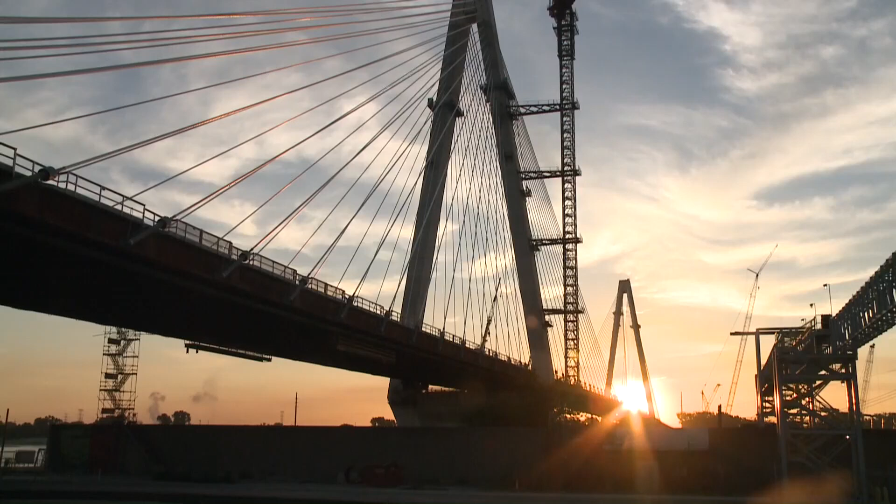Stan Musial and vets together, there's nothing, no more Midwest. Simply beautiful, strikingly complex. We could sit back and we could reminisce on, hey, we put that together. We poured that concrete. This is the making of the Stan Musial Veterans Memorial Bridge, a landmark of legend.

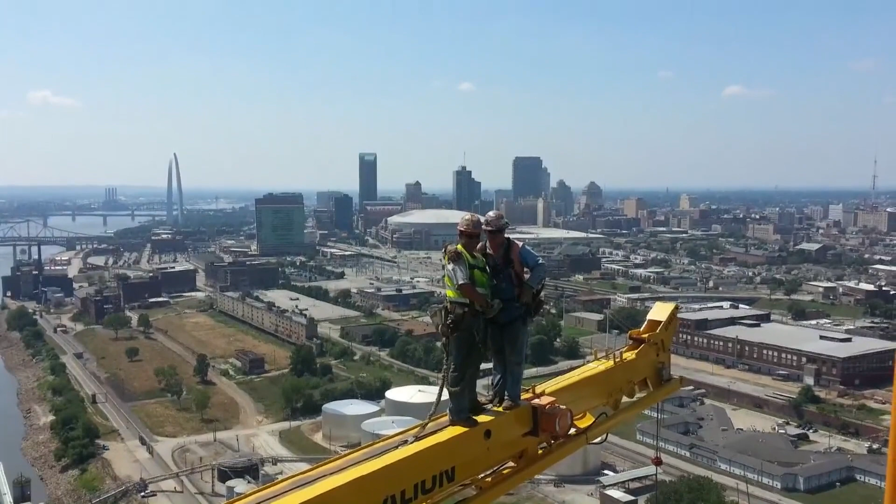Greg Combs and his friends had a front row seat. I kept thinking how lucky I was to be on that job. At one of our city's most exciting events. Being able to work on a landmark in your hometown is really something else. On this day, they share a few photos. What do you call them? Glamour shots? Captured from their unique perspective. Pretty much when you're building something, you remember setting almost every piece of it.

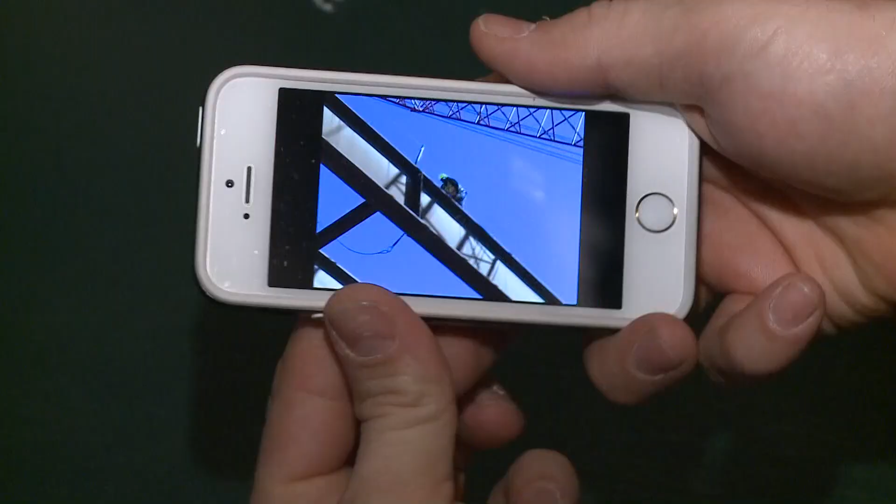Photos freezing moments of tension. You look at the numbers and it looks right on paper, but they were like 97, 98% capacity. Suspense. You had 167,000, I think that piece weighed, and you transferred it between 3 cranes in the air. Or just hanging out. I just got those two over there and they're talking. It's kind of neat seeing us, not in any kind of pressure, just how we're just kind of hanging out on the iron.

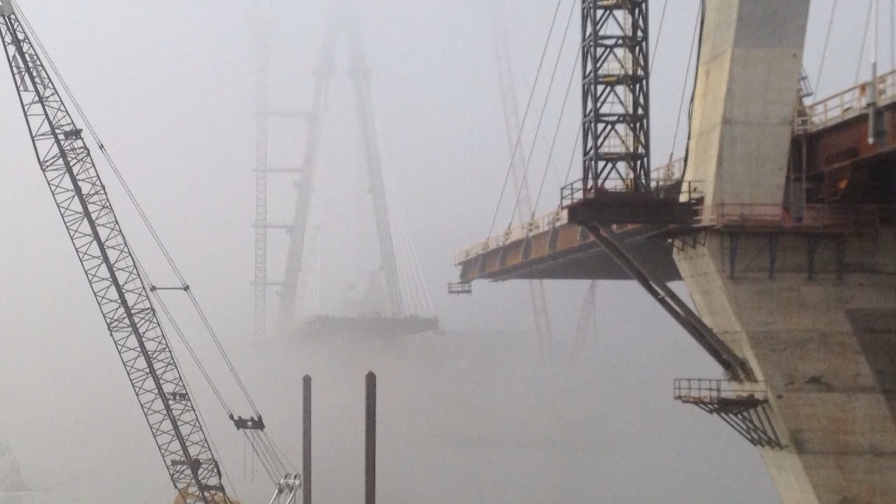Memories that will last a lifetime. We had a family day down there, and I got to bring all my nieces and nephew up there with me, and we all got us some pictures up there. They kind of understood what I did then. A structure that will last for generations. And you always catch yourself when you're walking out to your truck at the end of the day, you look back and look up, see what you did, take a second and say, wow, that's pretty neat.

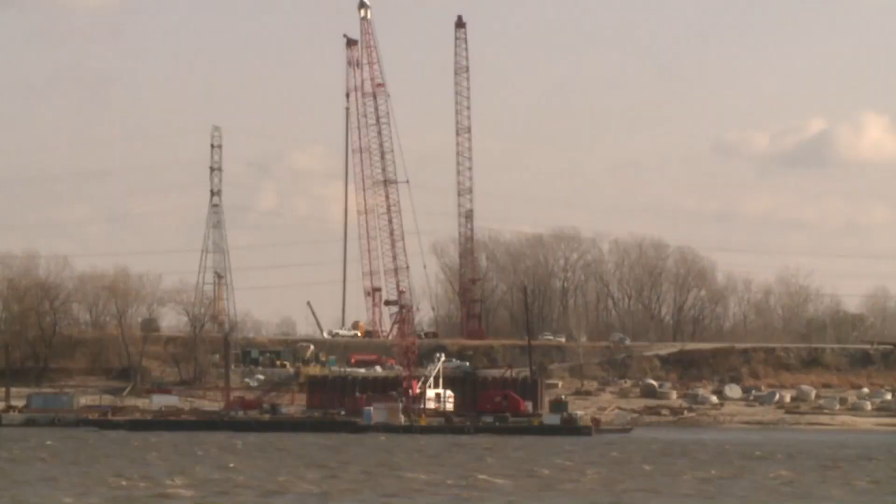The $700 million project started in 2010, right in the middle of the Mississippi River. But years before the bridge started to take shape over the river, there was work being done under the river. It's late in 2010, and workers are busy laying the bridge's foundation. Their first priority, building cofferdams around each of the bridge's 2 bases. The dams not only provide a place to work, but also give workers access to their unique job site. Greg Horn works for the Missouri Department of Transportation and is the project's director.

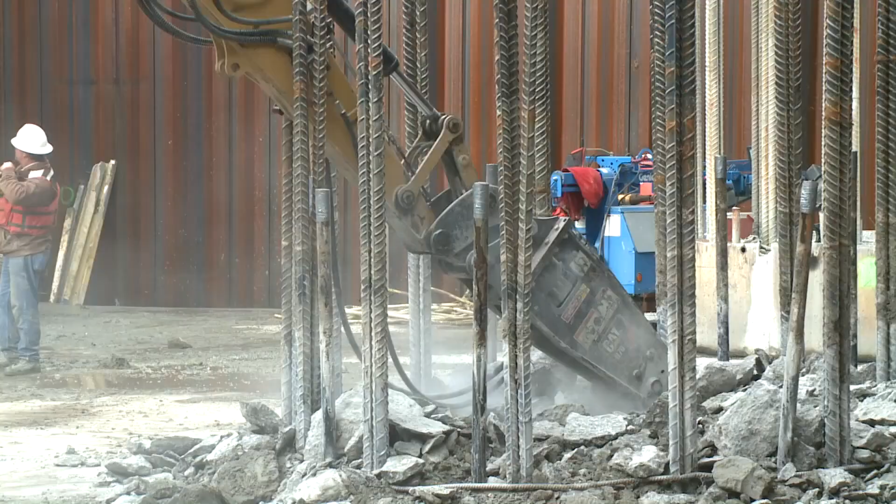Right now we're at the bottom of the cofferdam. We're about 20 feet, 25 feet under the water. We're actually sitting on the floor of the Mississippi River. Workers have drilled 6 shafts to support each tower. Tons of concrete, reinforced with tons of steel. They're 100 feet long. These clumps of 3, each one of those 100 feet long weighs about 2 tons. So when they set this in place, it's pretty amazing. They lower that down. And they have, you don't see them here, but they have bands underneath that are all tied together every 1 foot.

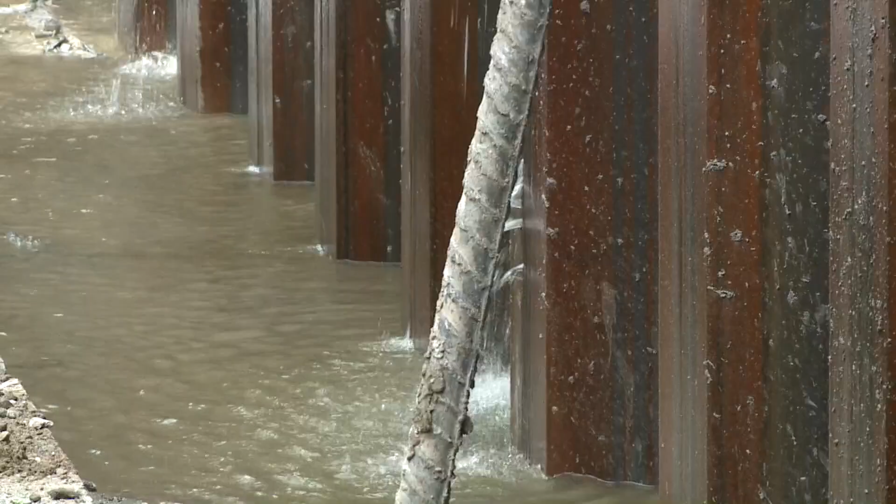Sheets of steel wedged down into the riverbed create a precarious workspace. There's always going to be water in here. You can never get these perfectly sealed, but raising up this working pad, they're able to work on something without being stuck in the water all day long. Workers will spend months inside these cofferdams, constantly aware of the changing river levels and the risks they face. So you're standing down there looking up. You can see the rust line when you're down there where the water is above your head.

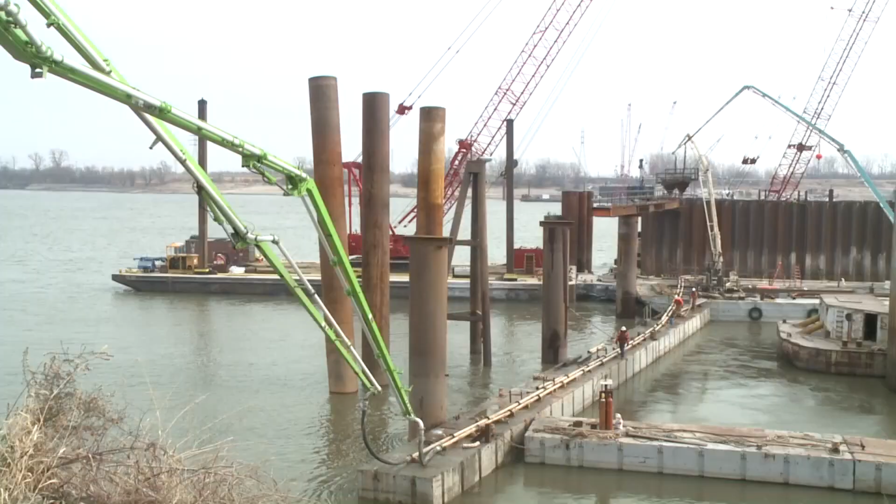And as the weeks wear on, the bridge's bases begin to take shape. Pouring concrete into the Missouri Tower seems like a never-ending process. They started last night at 1 o'clock. They'll end today probably at 3 or 4 o'clock this afternoon. So it's a 14, 15-hour pour. And the December weather is just another reminder that Mother Nature can be a help or hindrance. Engineer Randy Hitt is the project's assistant director.

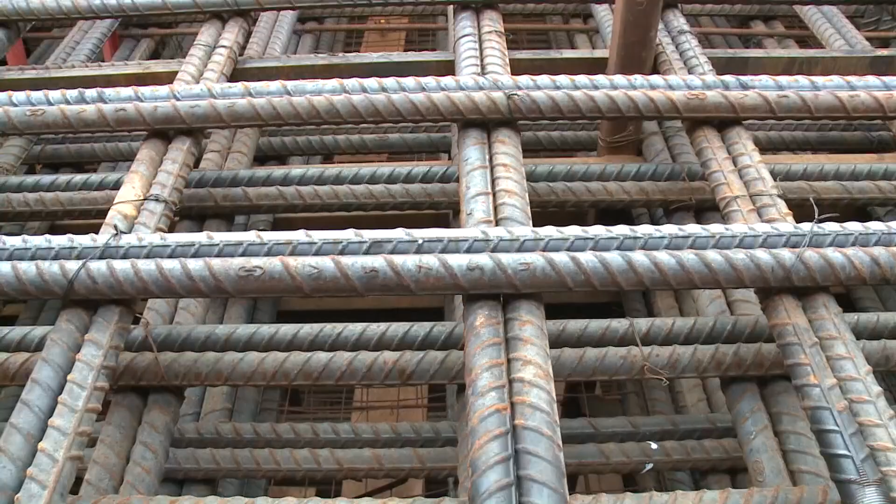Freezing rain and ice on the barges makes them slippery, makes it a little more hazardous, so a lot more caution has to be made to clean that off. Despite the cold, workers inside the cofferdam are carrying out the task of creating an intricate form made of rebar. What you're looking at is approximately 1.9 million pounds of reinforcing steel. So it's a lot of reinforcing steel to hold up all the seismic and weight of the bridge. When complete, these two towers will support about 31 million pounds.

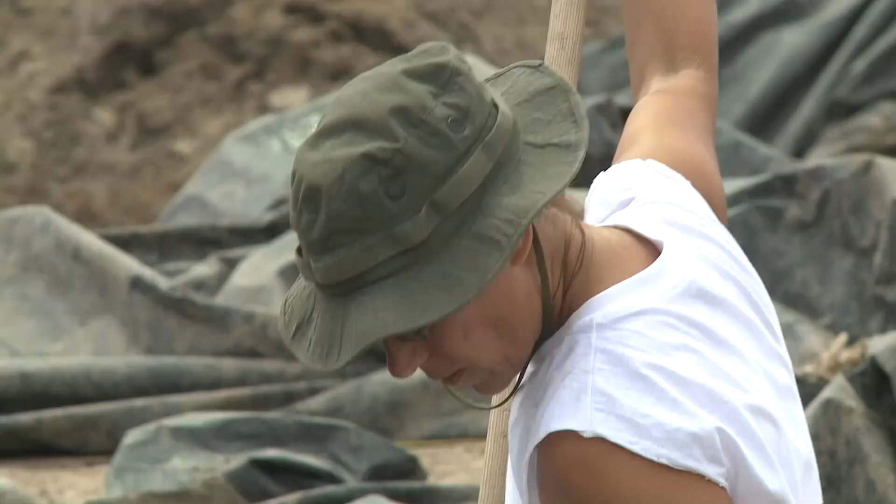As the towers of the new bridge begin to take shape, less than a mile east of the river, archaeologists labor to preserve what is old. Most of what we're digging are the remnants of everyday life. Joe Galloy and crews from the Illinois State Archaeological Survey are fighting the clock. This is really sort of a once-in-a-lifetime opportunity because of where this bridge and the interstate connector is going.

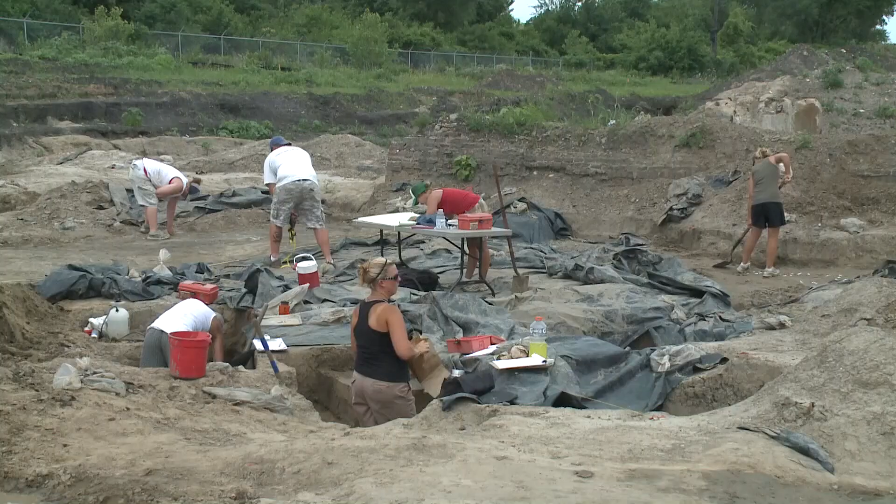Thanks to a federal law that requires a dig be completed before the bridge is built, they hope to save what's left of an ancient community entombed on the outskirts of the Mississippi. We're standing on the northern end of a large prehistoric site. We call it the East St. Louis Mound Center. Crews started excavating the dig site in 2008. It is a very, very slow process. They've spent years scraping away at the dirt, hoping to unearth the past that's buried here.

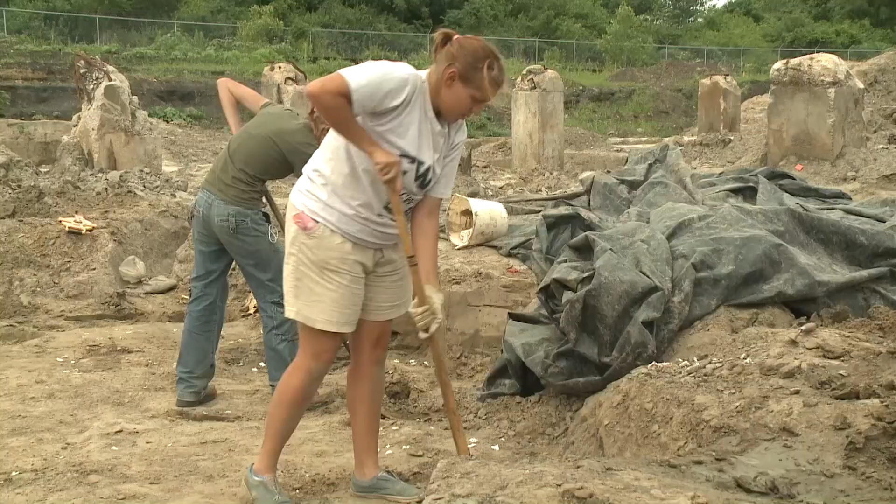No site is exactly like another one. And in fact, the percentage of what we really know about these ancient sites is very small. For Galloy, doing what he's passionate about in the state he grew up in is as priceless as the history being uncovered. One of the questions that I get asked when I tell people that I'm an archaeologist is, well, what are you doing here? They assume that archaeology happens in exotic places like Egypt or Central America or China. And I think part of it's just a lack of awareness that there was a rich, ancient Native American civilization here.

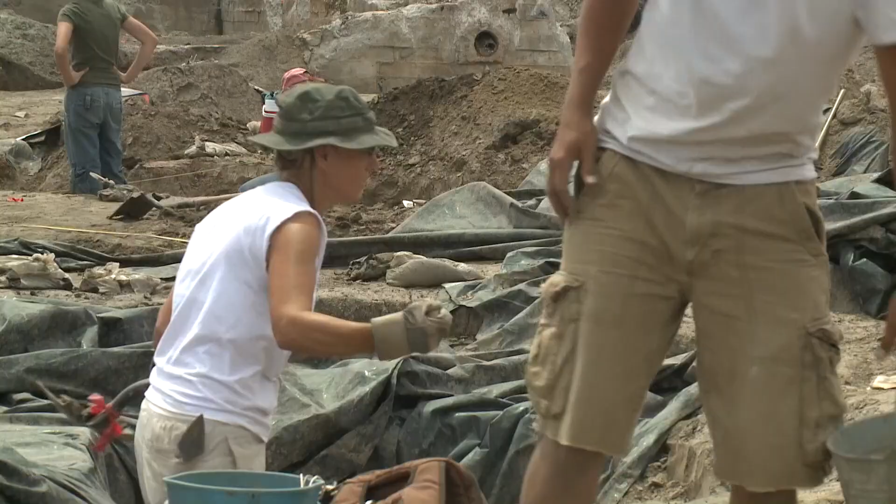Thanks to the dig, archaeologists now know that two separate groups of people at different points in history called the area home. The first between 950 and 1050 AD. The second group that came in were the Mississippian Indians, who were the people who built Cahokia mounds. The area was essentially a residential neighborhood, a suburb, so to speak, for a much bigger Cahokia. That's an image that, in terms of archaeology, we just didn't know that that happened. It also backs up that even a thousand years ago, location was everything.

We think that it probably also functioned possibly as a port city, an area where goods would come in and would probably go out. A few facts archaeologists may have never discovered if the new river bridge was never built. Finding those little tidbits of what happened helped to produce a more complete picture of, say, how far Cahokia's influence was.

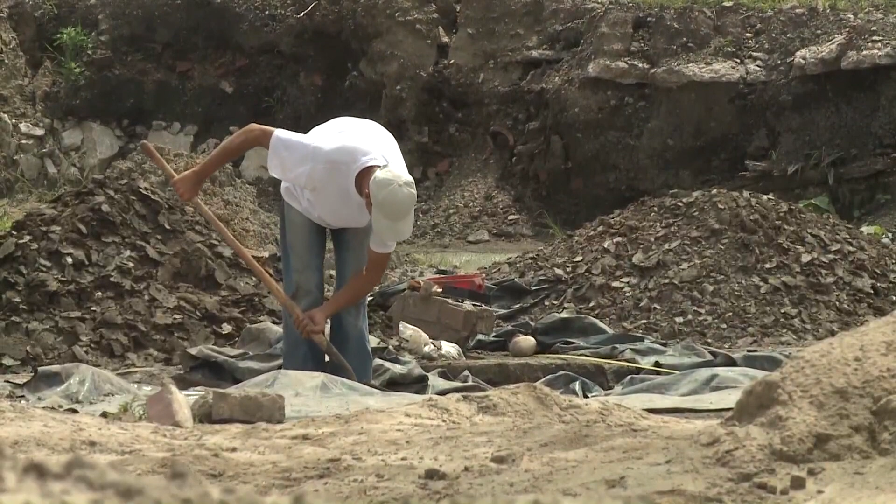The only problem is, the longer they get, the harder they are to ship. Constructing a monumental structure requires massive parts. Coming up, just how tricky getting those parts to the job site can be.

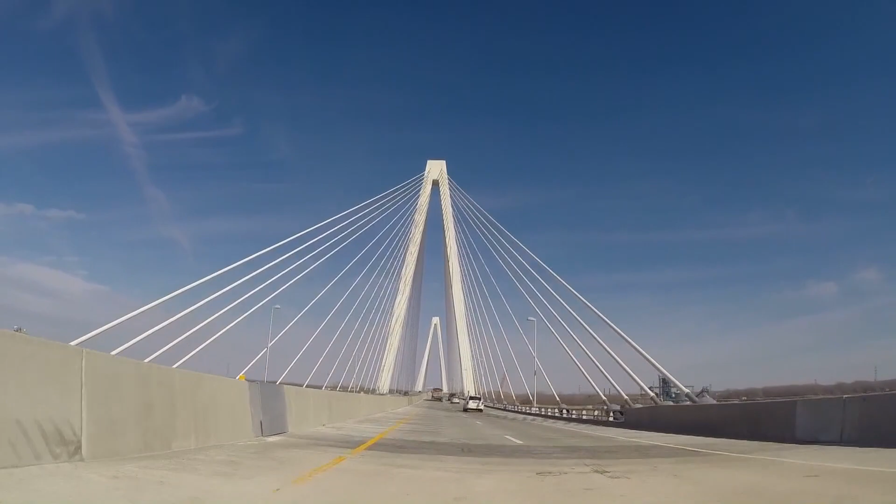The Stan Musial Veterans Memorial Bridge may be the newest bridge on the St. Louis skyline, but it's just one of many bridges in our city's history. From the McKinley Bridge to the MLK to the Poplar. Bridges were either built to get people into the city, over 100,000 people cross the Poplar Street Bridge every single day, or relieve the congestion on already existing bridges. It's a really great bottleneck, and now we see the problems that a bottleneck like that can cause.

But the city's first bridge was the St. Louis Bridge, better known as the Eads Bridge. Opened in 1874, it was built simply to connect the east to the west. Andrew Wanko is the Missouri History Museum's public historian. The Mississippi River had long been a difficult thing for people to cross, and like I mentioned earlier, steamboats were really the way to get things around. So this was incredibly monumental.

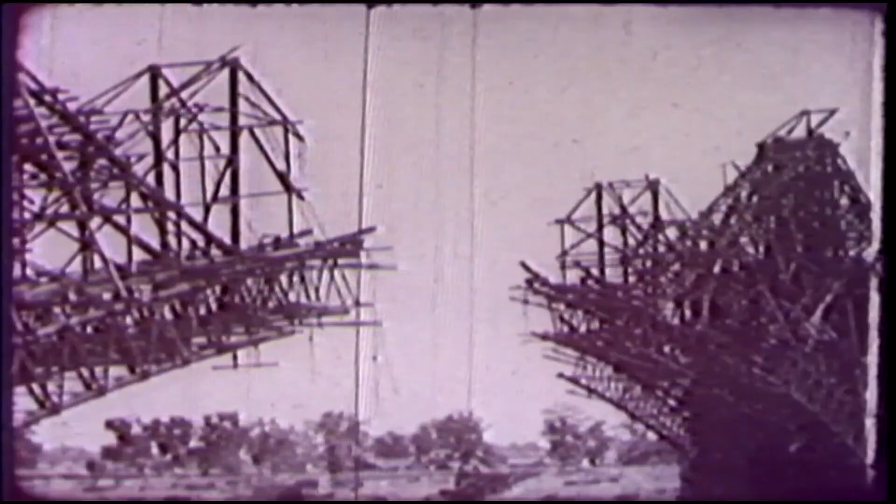The bridge was the brainchild of self-educated engineer James Eads. Considered a modern marvel, it was the world's first steel truss bridge. We look at the Eads Bridge now and we think, wow, it's massive, it's strong, it's never moving. People looked at it back then and they were terrified of it. But since steel was a new structural material, people just weren't convinced it would hold up as promised. People were really afraid, and bridge collapses were pretty common at the time, even under the weight of just one train.

And so they were really worried this could be a huge failure and sort of a black eye for St. Louis in the nation, a big embarrassment if this thing collapsed. Eads, who never seemed to lack confidence, also had a knack for showmanship. He borrowed an elephant from a traveling circus, and he walked the elephant across the bridge in front of a big crowd of people that had gathered on the levee. And everybody knew an elephant would never walk on something that couldn't hold its weight. And the thing, sure enough, it walked clear across to Illinois.

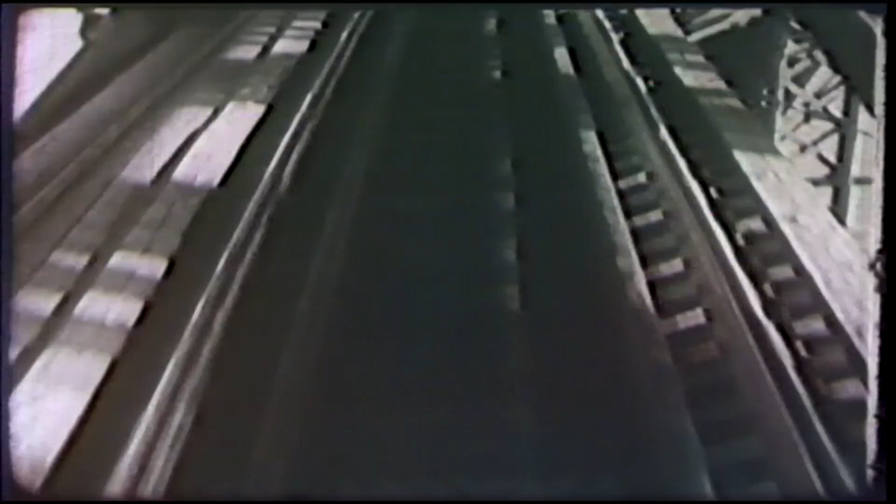When the doubts lingered, Eads parked 14 locomotives in the center of the bridge at the same time. One by one, they drove off, and no problems at all. The Eads Bridge originally carried rail and pedestrian traffic, but the railroads abandoned the bridge in 1974. By the early 90s, traffic on the Eads had slowed down to about 4,000 cars a day.

In 1991, it closed, reopening 2 years later when Metrolink began using the bridge's lower train deck. The old bridge underwent a major renovation, and in 2003, traffic began rolling across the Eads Bridge once again. And the rest is history. Once completed, the bridge will be the third largest cable-stayed bridge in the United States. And when you're building a bridge that size, just getting the parts to complete it is a very big job.

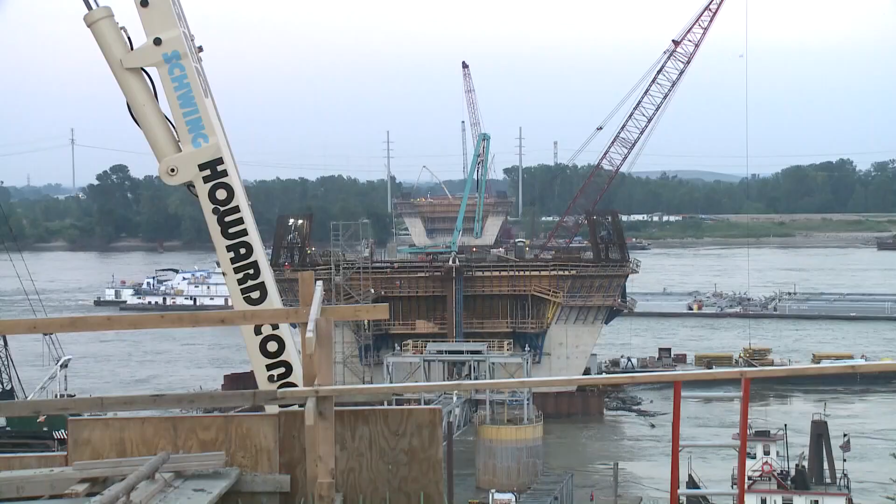Building a bridge isn't just about building a bridge. You have to get to it to cross it. You know, there's 31 construction projects, and it's all like a big puzzle. And MoDOT's Greg Horn is in charge of making sure that each piece is put in the right place at the right time. This is just bringing one girder, one of 100 girders onto this project. In the spring of 2011, workers are maneuvering a 125-foot-long concrete girder from Interstate 70 down to the Missouri approach.

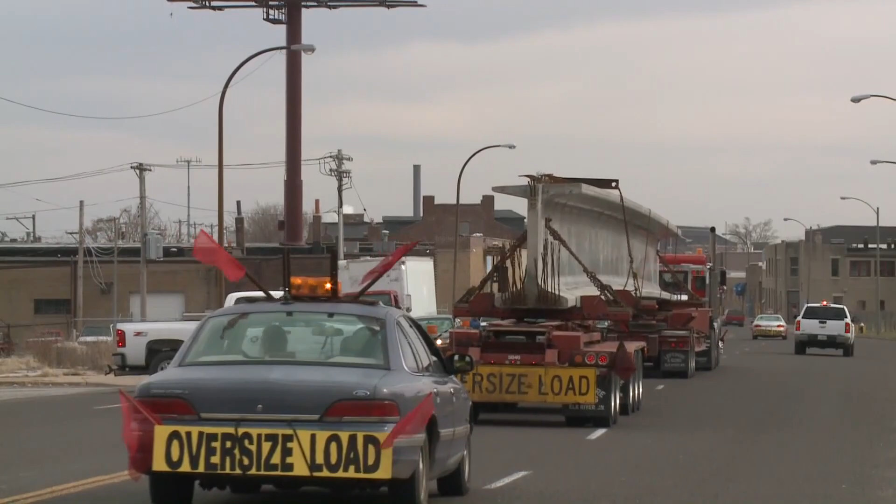Interstate's not as big of a problem as getting off at the interchanges and making around turns, and that's why, if you'll notice, the back wheels can turn also. So there's actually somebody in the front of this truck that steers the back, and then somebody that steers the front of the truck. Horn says it's a move that will be repeated again and again. Once on the job site, 2 crane operators work in tandem, lifting the bulky beam into place. Most girders, they typically only have one crane doing it, so the two operators have to work in conjunction with each other, which makes it more difficult.

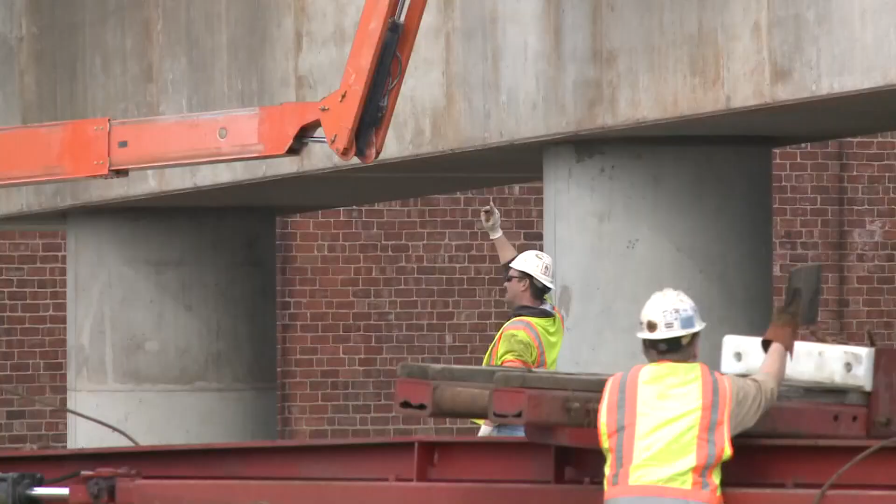Foot by foot, the crane operators negotiate their precious cargo forward. It's not a typical day's work, even for these skilled men. And that's really hard when you have to walk with the crane rather than just boom over. Yeah, because then there's a lot of movement. It takes a good operator. More than an hour after its arrival, workers lower the beam into place. Teamwork is paramount. You know, a lot of times crane operators can't see exactly where they're setting stuff down, so they have to look at the guys on top that are giving them hand signals. As soon as all the pieces are in place, work begins on another puzzle. It will be another 4 months before they pour the driving surface on the Missouri approach.

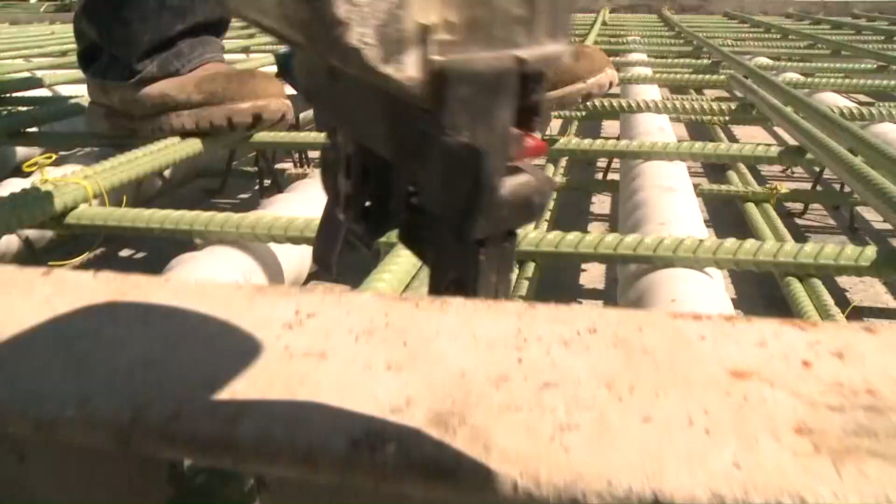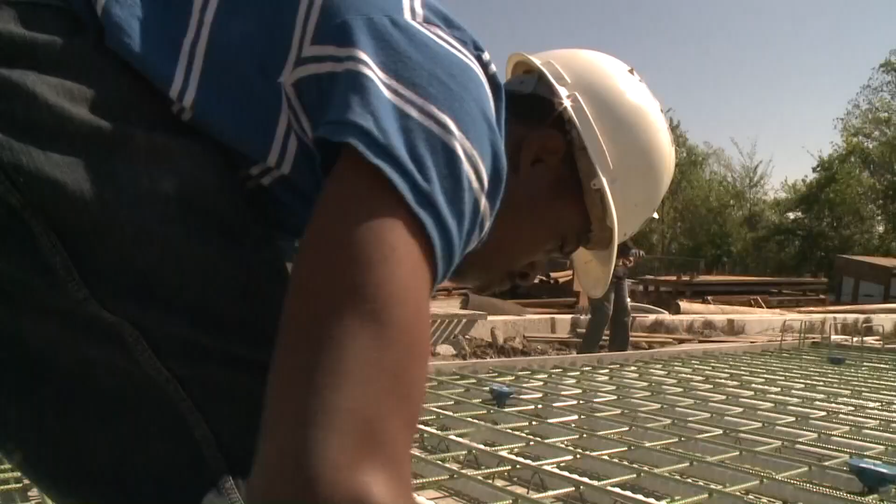About 25 miles from the main construction site, right now we're taping this off so the concrete doesn't leak out. In the heart of St. Charles County, keeping it in the forms so that it won't fall and keep the right level. Construction workers are putting in 8 hours a day. So when you're driving, you don't have any bumps. Each adding his touch to the bridge. I've been building this bridge since last year. Ordinary guys like Dave Stewart and Andrew Leach. Tie wire, put it all together, bend steel and stuff like that. Doing extraordinary things. They're part of the crew at XL Contracting, where workers are tying, pouring, and scraping.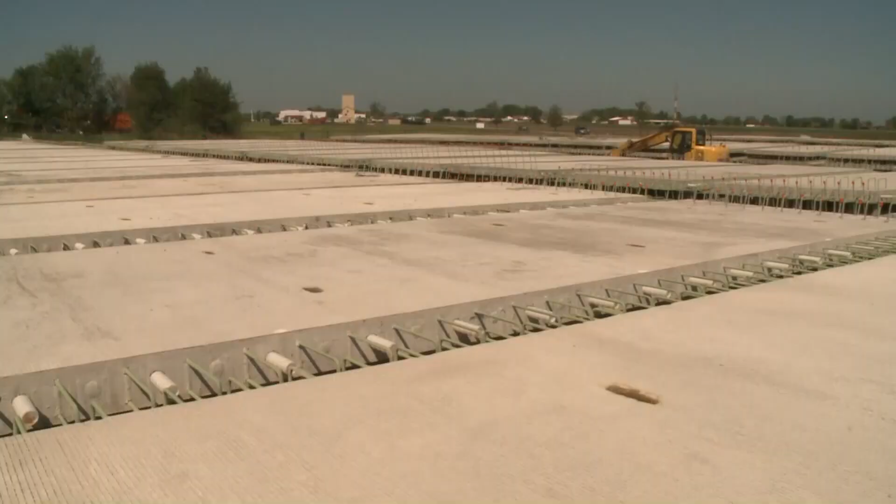Pete Allen is heading up this off-site construction project to build the bridge's underlayment. They are making precast panels. A lot of them. 456 total. There's 376 standard deck panels. There's some counterweight panels. There's roof panels for the towers themselves, but 376 roadway panels. Each panel is handcrafted and custom built for a specific place on the final structure.

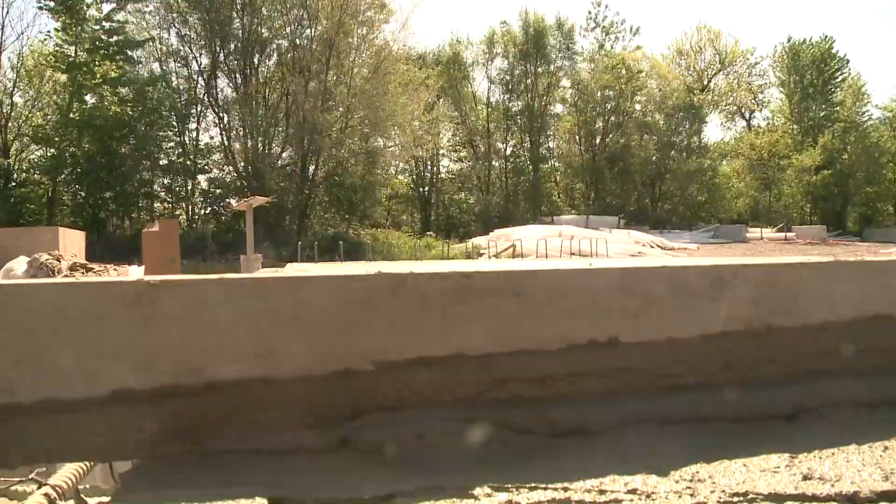First, the form is laid out according to the diagram specs. Next, rebar is placed and tied off. After the work has been triple checked, the slab is poured and floated. It's repetitive, painstaking work. We've hit as many as 14 in a week, but it's usually 8 to 10 a week, depending on rain days. But to these men, it's worth it. They're helping to build history.

Especially when I drive over it, too. Get to drive over and see that I made this, though. So that's always good. Yeah, something that you can tell your grandchildren that you are part of when you're driving across it, knowing that you did a good job, that it's built safe for everybody else. They all realize it's a once-in-a-lifetime opportunity.

I'm still pretty early in my career as a civil engineer, and to be working on a project of this scale right off the bat. You know, I'm 4 years out of school and working on one of the biggest bridges in the Midwest right here in St. Louis, Missouri. It's pretty neat. Once completed, the panels are cataloged and stacked. The first ones built will be the last ones laid into place on the bridge's deck.

I saw how a bridge is being constructed, which is like a blast for me. Out of the classroom and down to the river. Coming up, engineering students get a glimpse of their future.

It's early March 2011. The cofferdam is completed. And construction continues. The footing is poured. But now conditions are a little different. Before, most of the other stuff was all underwater, and now we're actually coming above water. For the first time, the towers are beginning to take shape. Now you got the tower steel coming out of the footing, and they're getting ready to form up for the first concrete pour.

For weeks, iron workers craft a steel cage, making sure each piece is perfectly placed. Small errors can quickly turn into large problems. It's actually like a big puzzle trying to fit all this reinforcing steel into the place here. And trying to get it all lined up right.

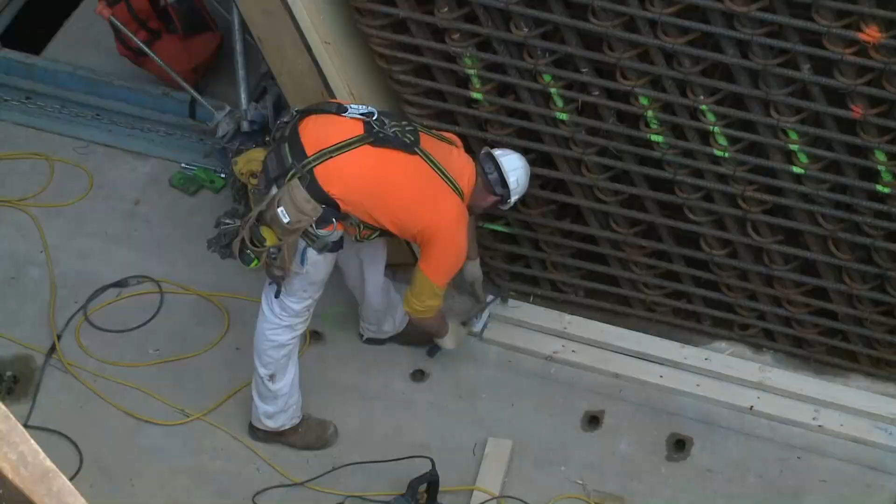A wooden form is built around the structure in preparation for the largest concrete pour of the entire job. Before it's done, workers will use enough concrete to pour what amounts to roughly 3,600 backyard patios. Probably going to have 400 truckloads of concrete, which will be pumped from the trucks through a maze of tubes and into the cofferdam. Then all the people, you can't even see them. They're down in the bottom mat of steel and moving these hoses around.

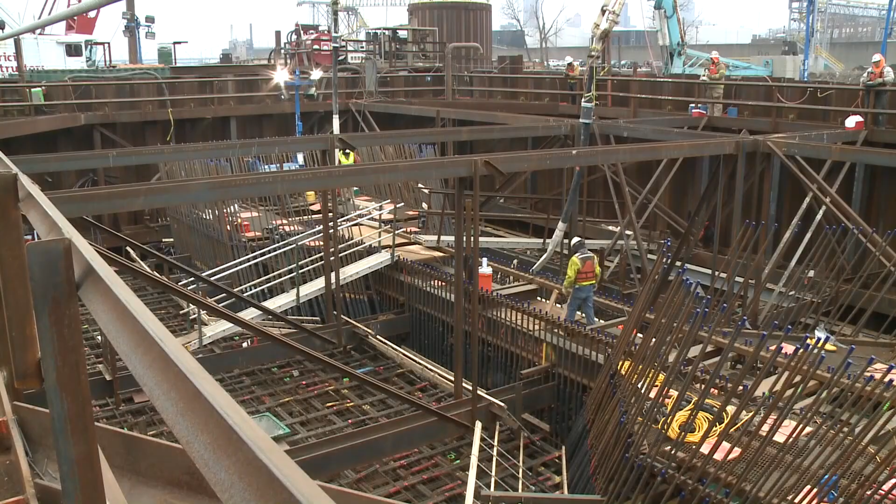What took 2 days to complete will take 2 weeks to cure. It's a process workers will repeat 6 more times before the base is finished. They'll pour to this flat surface down here today, and then they'll tie more steel in it. This tower progresses up from there. So all this steel will be sticking out of the concrete. When this phase of the construction wraps up, the base of the tower stands nearly 75 feet tall.

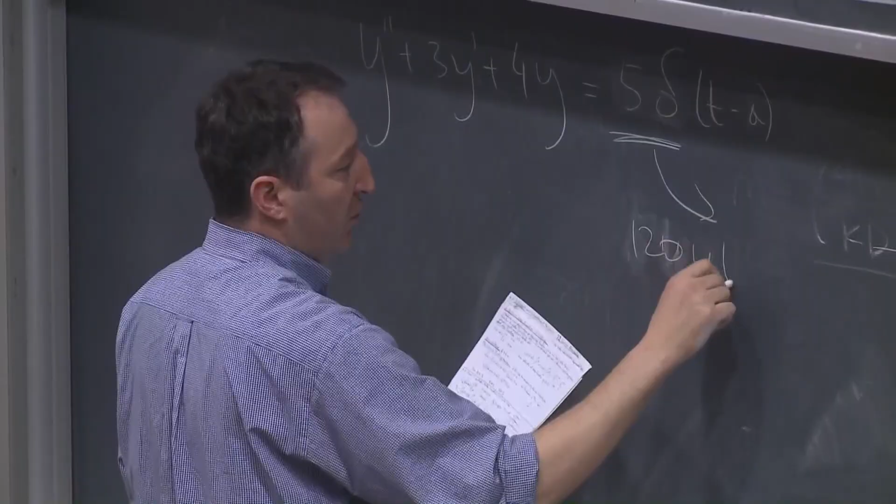St. Louis hasn't had a new bridge since the 1960s. It's provided a rare opportunity for students who hope to one day build bridges of their own. You say 120 U of T minus 3. It's another night of impossible math. What's important here is that once you're breaking up this in partial fractions. For students in the University of Missouri St. Louis Washington University Joint Engineering Program. This would be A plus K.

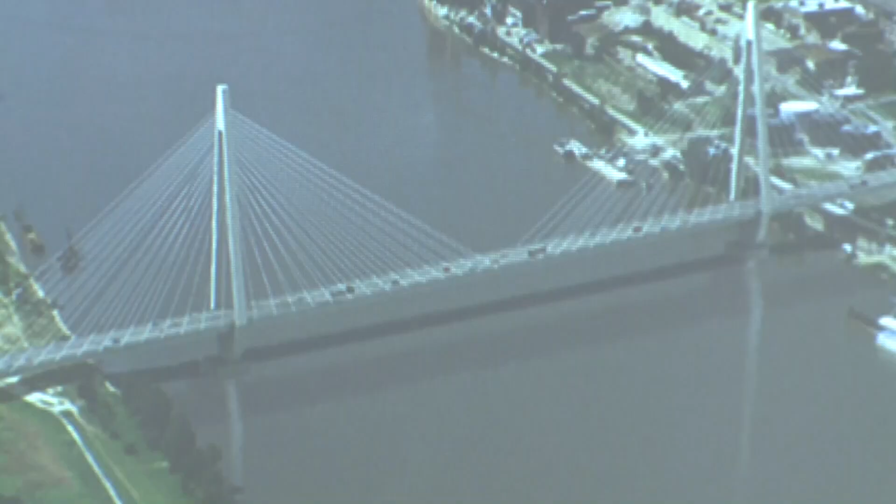But today, the future engineers are leaving the books and blackboards behind. So this is what the bridge is going to look like when it's done. Taking class on the road. This is a great opportunity for the students in the University of Missouri St. Louis Washington University Joint Engineering Program to come out and see engineering in action. Here's I-70. They're getting a first-hand look at what it takes to build a bridge. Not only the design process, but the actual result of the design, the actual build.

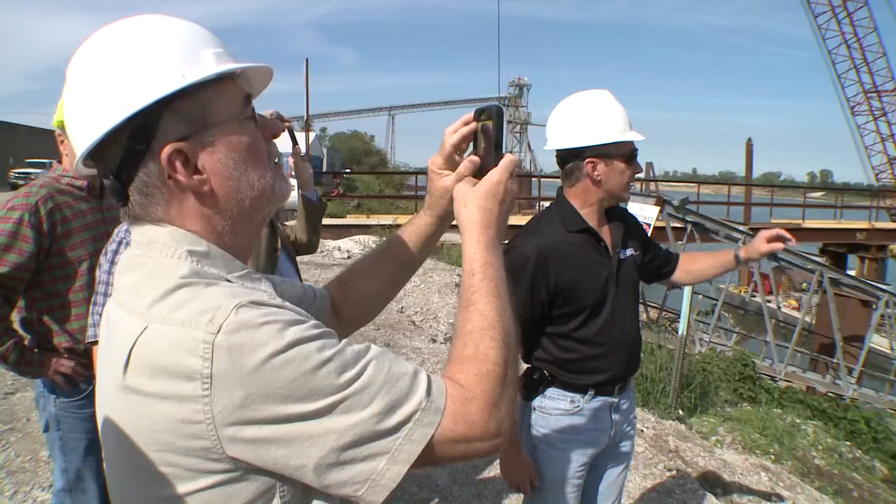It's a chance for civil engineering major Yahya El-Assadi and other engineering enthusiasts to get a glimpse at what they hope will be their lifelong careers. When I decided to become an engineer, people ask me, what do you want to do? And I say I want to build bridges and buildings. So I tackled the first one today. The crane, that's a Manitowoc 7000. It's a 400-foot crane with a 60-foot jib. It's one of the biggest they make in the world. You don't see too many of those.

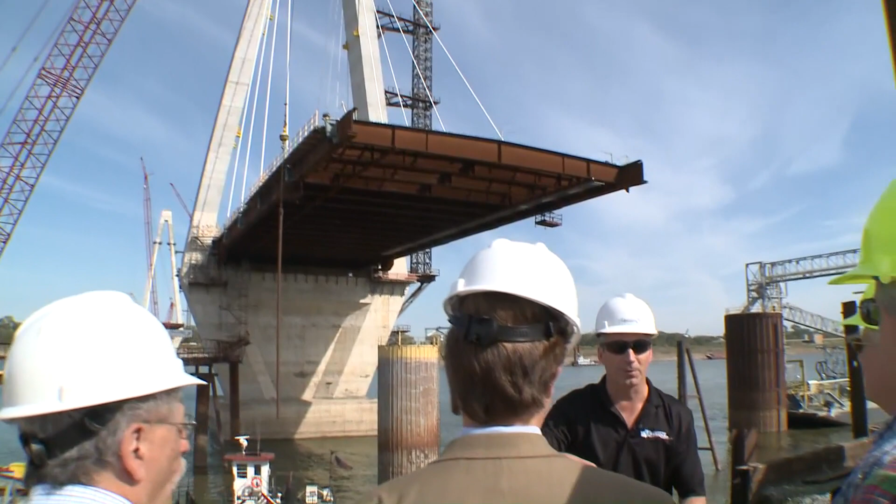From large equipment to the smallest of details. Studying it, reading about engineering is not enough. You have to come out and see what they're actually doing, or in the concepts. Put in like pictures with what you're learning. It's just amazing to me. To me, it's not just the lighting or the deck, or it looks so cool. It's knowing the whole system and how this is going to impact St. Louis. From compression to stress to trusses, students get to apply what they're being taught. As an engineer, I immediately appreciate how much work had to go into this.

All the calculations, the planning. I mean, you could imagine how hard it is to start a bridge on 2 ends and then build it up to meet in the center and hope that everything is okay. There's a different color in concrete as you go up the towers. Every aspect of the build piques their interest, even concrete. We had to have steel slag in that to help cure it, and so it looks a little bit different.

It's something you just can't get in a classroom. To see a bridge being built is a unique opportunity, and we're thrilled that our students had the chance to come out here and see this. And for some of them, watching from the sidelines just isn't enough. But I was hoping we'd go up there and actually look on the bridge. That would have been a treat for me. It was very exciting to be here and to see it hands-on. I wish we could be closer, but I'll take what I can get.

About 60 students graduate from the Joint Engineering Program each year. Most of the students are from St. Louis and will stay right here.

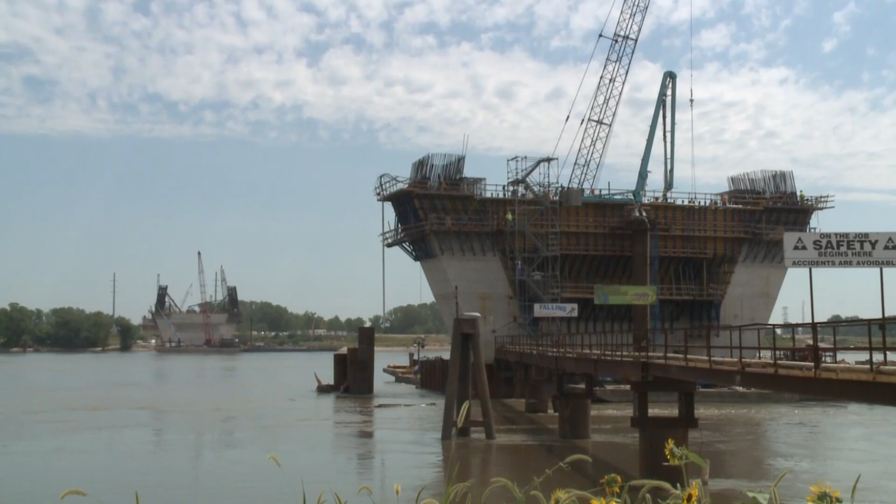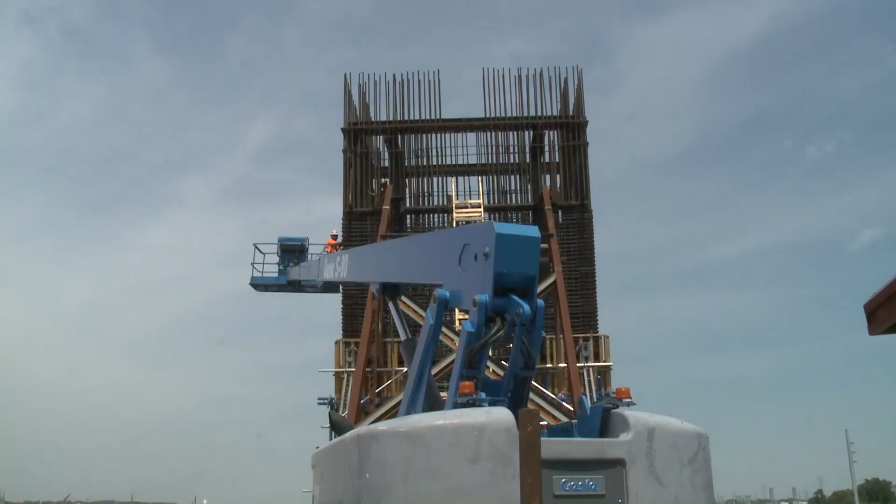Engineers have budgeted almost a year to complete the towers, and despite river levels being high, we lost a few days, but we're still on track for an early 2014 opening. It's a schedule Project Director Greg Horn intends to keep, but one that will be challenged in the months ahead. But for now, with machines and muscle, progress comes 15 feet at a time.

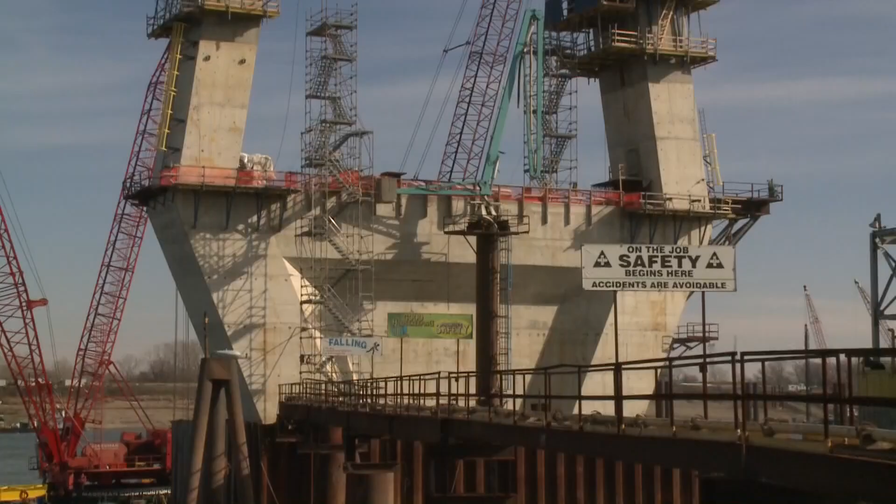By winter of 2011, we're about 175 feet in the air. The job is at its halfway point. The construction is going fabulous. The river has been cooperating for this last 6 or 8 months. But with the cold comes uncertainty. And the higher up they go. When you get up there on a windy day, it's really hard to have the cranes lift stuff up. There's been a few days that we've had to shut down because of the wind.

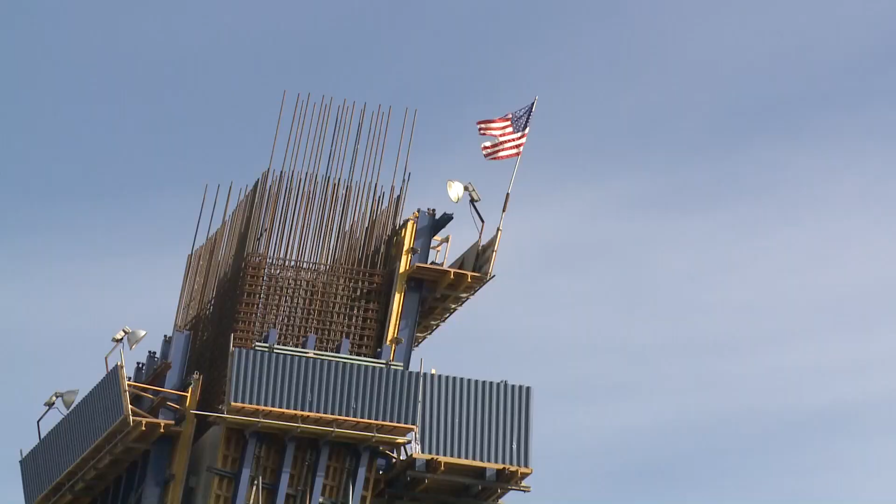Up to this point, the towers, filled with rebar and concrete, were solid. From here on up, they'll be hollow, giving future maintenance workers access to the top. And there'll be a ladder on the inside for somebody, when we're done with this thing, to climb up and change light bulbs on top.

Carpenter Chris Wilson is no stranger to the big job. Yeah, I worked on the Clark Bridge. Worked on the football stadium over there, the ballpark. He's grown used to close quarters. It's real challenging working in that core when we go to strip and roll the forms in. It gets really tight. Not a lot of room to move around. But he takes it all in stride. I'm just here for the exercise and the camaraderie.

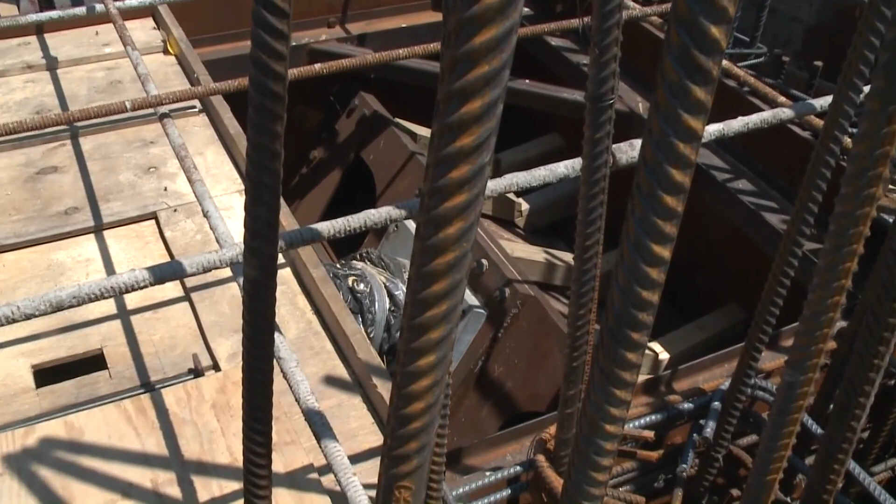When the towers reach just over half their height, gigantic metal boxes are fitted into the core to help anchor the bridge's support cables. As the cables go through there, they get tensioned up, and then there'll be a white conduit that goes over. There's probably about 72 cables inside of there, and then there's a white conduit that goes over the whole thing and comes right on through the side of this pier here.

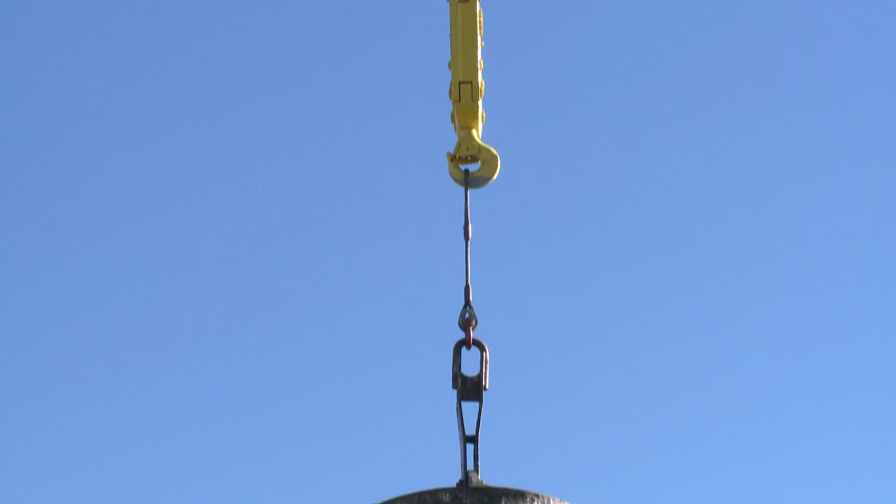One by one, gigantic buckets of concrete are hoisted to the heavens, and foot by foot, workers approach the atmosphere. We're about 370 feet in the air. We're on the Missouri Tower. Finally, in mid-May 2012, so you can see on the right is the downstream, and on the left here is the upstream leg. The tower legs stand a mere 10 feet apart. They're going to pour this piece tomorrow, and then we have 2 more pours on top of that to connect these 2 together. So within 3 weeks, we'll have this thing topped out.

He was great, yes. And what he put into it with his heart. He was a worker with a passion for building. Coming up, remembering Andy Gammon, a husband, father, and son. The man who lost his life building the Stan Musial Veterans Memorial Bridge.

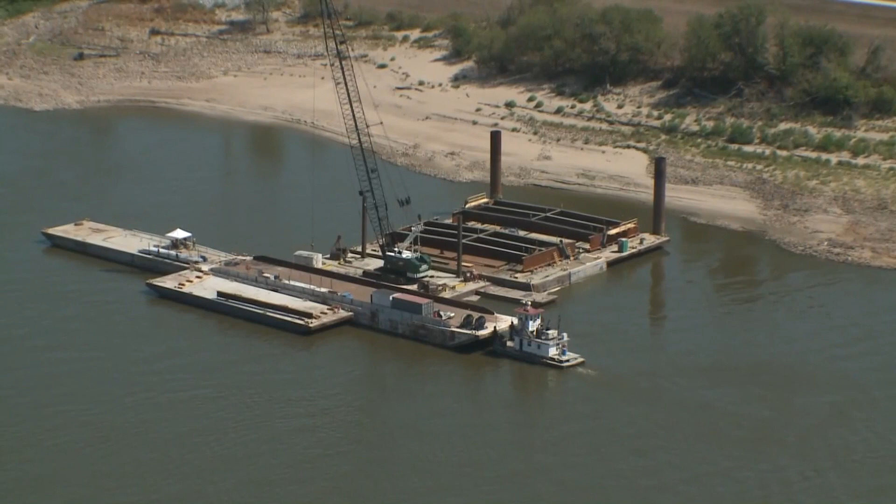It's the middle of August 2012. The towers are topped and work has begun on the bridge's main span. The span in between the 2 piers is 1,500 feet. Makes it the 3rd longest cable-stayed bridge in the United States. The plan is to lift pre-assembled field sections from the riverbank and attach them, building out evenly on each side of the towers. Under the best of conditions, it is an epic balancing act.

For the next few months, we'll be closing the gap in the river, with both sides going out at about 130 feet a month. It doesn't take long before Mother Nature has her say. A hot summer with little rain results in low river levels, something bridge engineers hadn't anticipated. The problem is the water's low enough that we can't get barges between the Illinois bank and the Illinois pier, making it impossible to float the massive field sections into place.

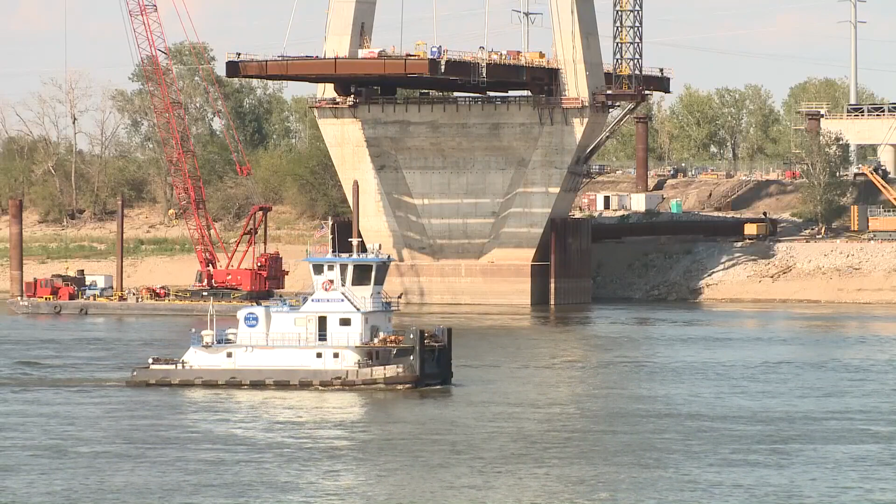Since they can't do that now, they have to build those in the air piece by piece, and that takes a little bit longer than they had planned. Despite delays, engineers still anticipate an early 2014 opening. December 2012. A large sheath of conduit is rolled into place. It doesn't really have any structural value. All the cables inside of that is what holds the bridge up.

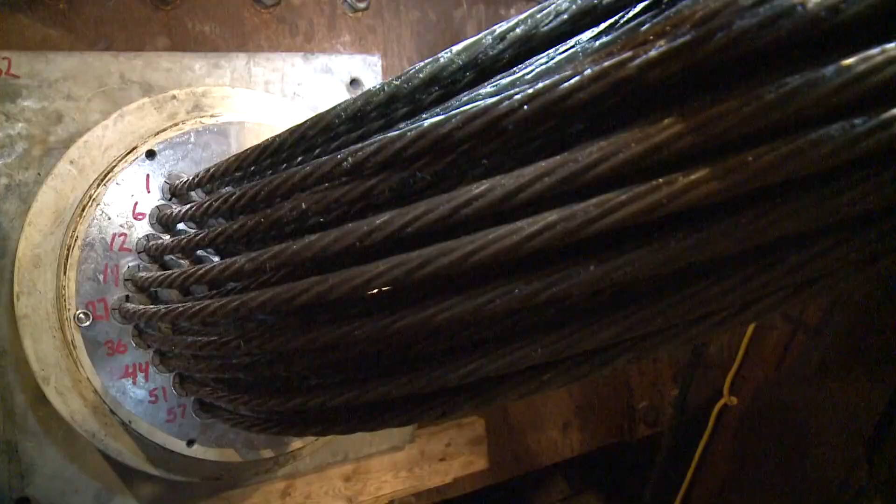Each cable on the inside is about the thickness of a nickel. The number of cables in each conduit varies. We started off with 23 cables at the very beginning, and by the time you get all the way to the end, you'll have 76 cables. It's enough cable to stretch from here to Kansas City and back.

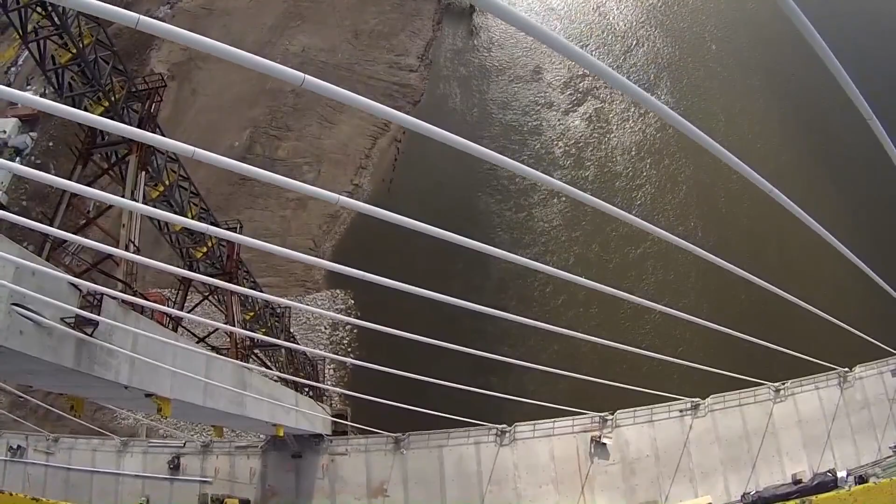Inside one tower, workers pull the cables, each cable's tension specifically calculated for the amount of weight it will bear, then simply wedged into place, securing hundreds of thousands of pounds below. Ready for liftoff. All right, heading up in the man basket. A month later, the new year brings new perspective to the construction. So we're about 6 cables from the top. We got 17 altogether, so we're over 2/3 of the way done with the cables.

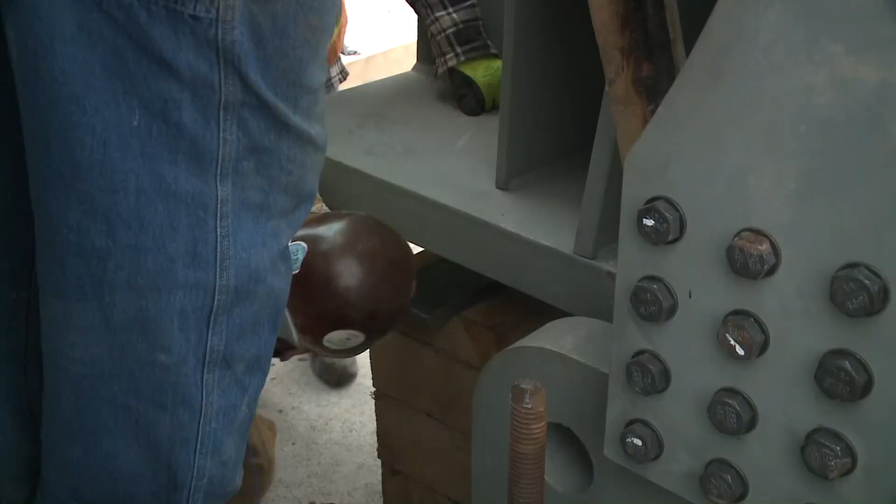Standing atop the Illinois Tower, looking west, the span creeps toward the middle of the Mississippi. And we hope to have this whole thing completed by about a year from now. A few weeks later, another check mark. The girder connecting the main span to the Missouri approach slides easily into place on one side, as the crane operator gently lowers the other side into place. I got 4.5. Workers check to make sure the beam is centered properly, and when they are satisfied, the Missouri approach is successfully joined with the main span.

Building this bridge has not been without sacrifice and tragedy. 35-year-old Andy Gammon of Park Hills was killed in 2012 when the lift he was working on fell into the river. His family believes his work was not in vain. This one was one of him when he was 4 years old. Family photographs are now more precious than ever to Andy Gammon's parents, Susie and Ed. Andy was a carpenter by trade, and the Gammons say even as a little boy, Andy loved to put things together. He played with blocks a lot and did things like that. And when he got older, some of his drawings were like about houses and things like that.

Those years moved fast, but his folks said he blossomed as an athlete. He was a standout center fielder at Central Park Hills High School. His senior year in high school, he batted .500, and probably 90% of his hits were infield hits. Despite a football scholarship, Andy's parents said college really wasn't for him. It was building that captured his heart, so it became his life's work.

He was a perfectionist. I worked with him some when he'd build a house, and we'd get into it. You know, his first house he built, I'd make a suggestion. He said, "Dad, I do this for a living. You just carry me some lumber over here and I'll do the building." Andy married, had children, and his parents say cherished his time as a father. He wanted to work close to home, but it wasn't always possible. He worked a lot of hours, driving back and forth to St. Louis, but he came home on weekends, and he just hated that. He hated being away from them.

Greg Johnston wasn't supposed to be an iron worker. My family was all pipe fitters. I'm the first generation iron worker. But when he was 12, a friend's dad took him to the iron workers picnic. And I saw what they were doing, and ever since then, wanted to become an iron worker. A choice that's taken him all around the country. Well, I spent a year in South Carolina on a nuclear facility, 6 months in New Orleans on a Seabrook Gate project. But this July day finds him at home, right in the center of the action.

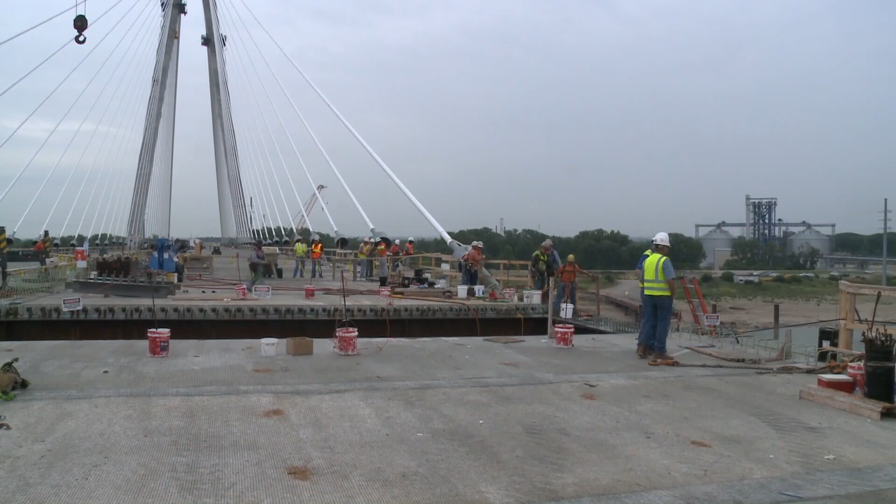Hold that, stop. Workers are preparing to hoist the final piece of iron onto the bridge. It's a difficult process, but after a false start to free the flag, good job, Captain, the final piece is airborne and headed for home. Hey, Scott, I'm going to stop you once you get off the road deck. We're going to grab that leading tag line. About 8 more feet. Swing into your right.

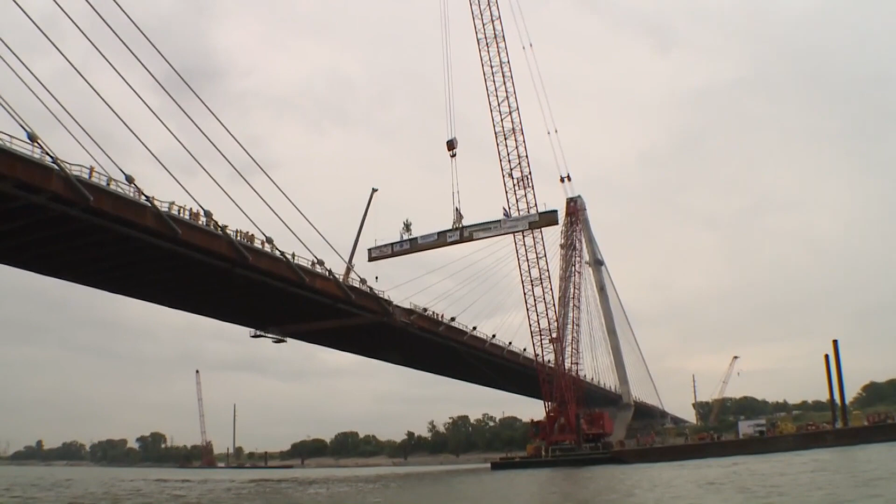Tension mounts as the beam approaches the bridge's structure. There's little margin for error as the crane operator blindly maneuvers the girder up over the bridge's cable. Let's hold your swing there for now, Scott. Straight boom down. 20 feet. Across the deck. Start working down on your line. And down into place. Keep coming down and hold that.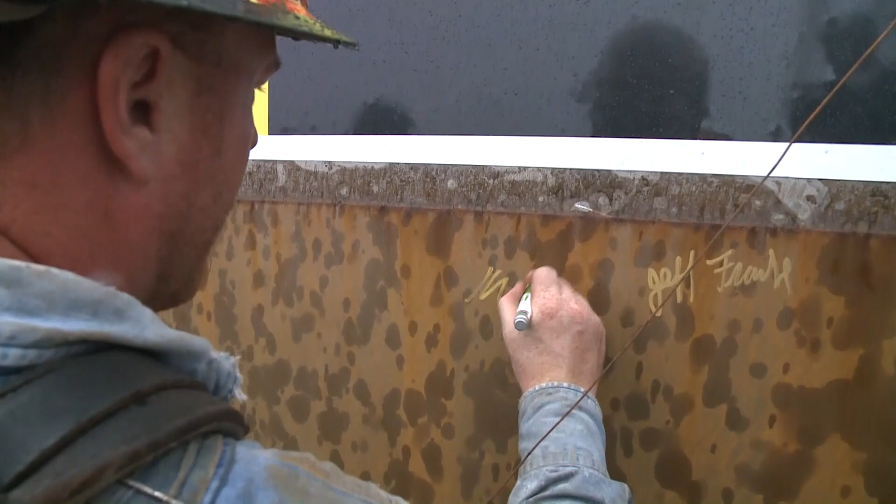As Greg and his fellow ironworkers take their turn in front of the camera. Hank, loving the signature, baby. And pause to autograph their handiwork. You like that? I like it. It's the same always, baby. They know the most delicate part of the job lies ahead. All right, Scott, coming up on your line. We're on you about 4 or 5 feet.

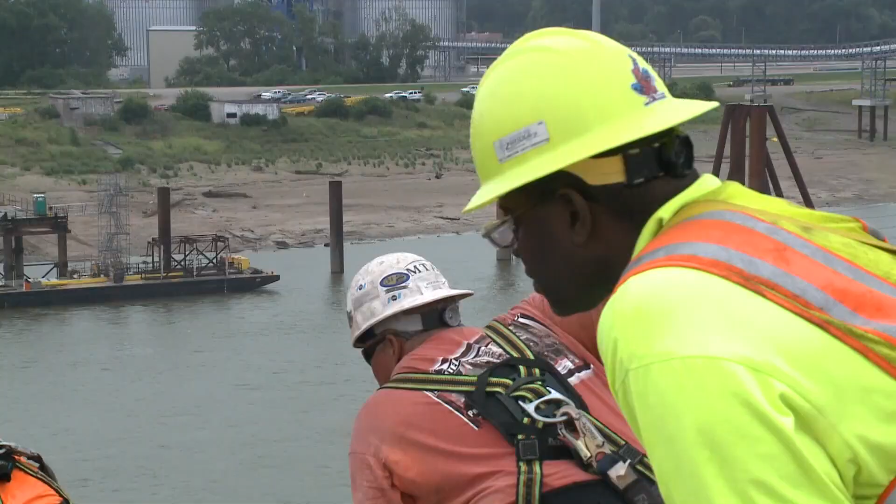Workers must place the gigantic beam between the two edge girders. It's a tight fit. Keep coming down, looking good. They hold their breath as the beam is lowered the final few inches. Coming down. Coming down. Hold that.

When workers hammer temporary pins to hold the girder in place, Johnston breathes a sigh of relief. No fighting, baby, no fighting. A once stubborn structure. I can't believe it fell in like that. We fought so hard on all the other ones, and that one just fell in. Now tamed. We talked about it all morning. We took a lot of measurements to see what it was going to be like, and it was going to be close, really close. And then I guess the weather was right.

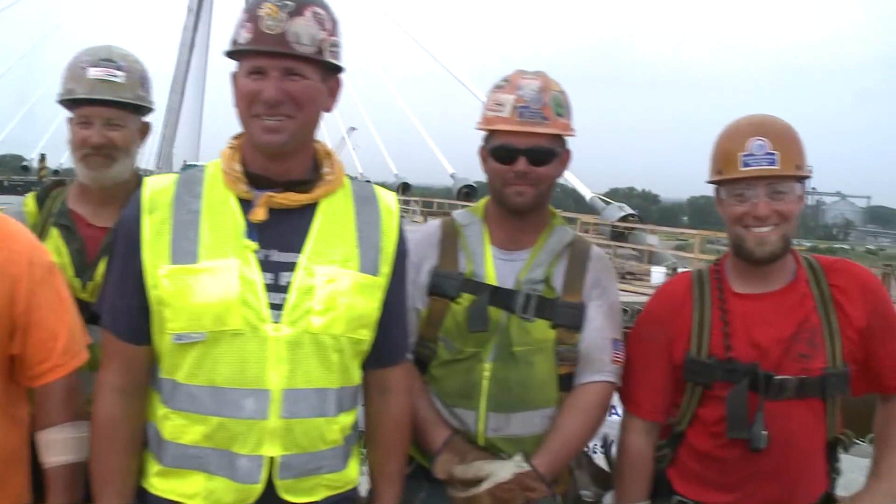One more job Johnston and his fellow ironworkers can be proud of. Whether you're building this or a building, every day when you leave, you look back and you can see it growing. It grows and grows. You get to see a new horizon every day.

As the bridge neared completion, it was time to party, or at least picnic. So one summer afternoon, workers got the chance to show their families what all this fuss was about. Learned a lot, you know, that I'll never forget. Carpenter Lynette Bryant is celebrating. Not only was she grateful to be part of a historic moment, but is so happy the job meant so much to her. It was amazing, you know, and how fast we caught on and how fast it went up.

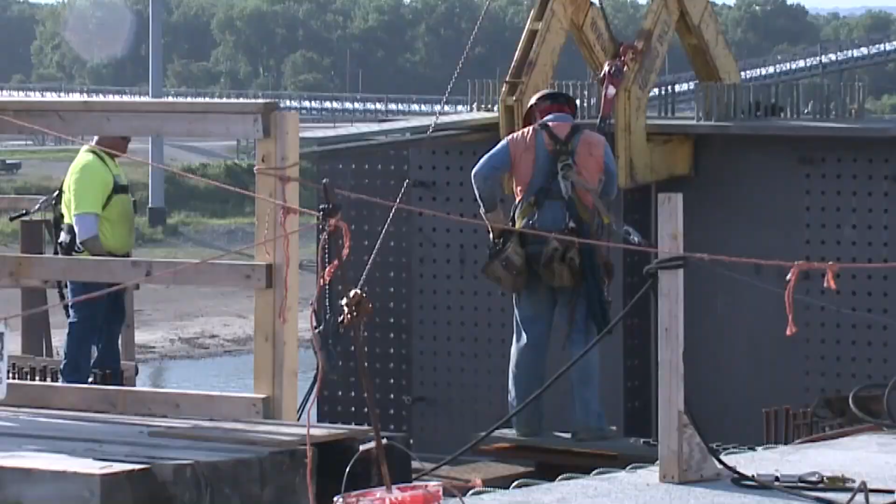Bryant says she still can't believe she was a part of it. Every day I just look and just say, wow, I'm gonna be a part of history. You know, every day it just amazes me. Bryant was with dozens of other workers and their families who spent the afternoon in the shade of the bridge, reminiscing about what they've built so far. It'll be a memory because I live in this area.

Crane operator Lance Miller had another reason to mark the day. It was the end of a 34-year career. This job, though, among his most memorable. It's been a wonderful job. I mean, I did the McKinley Bridge up north, but this one here, it's a brand new bridge. It's been quite a job. Miller says there was stress and challenges along the way, but he and his co-workers can look back fondly. Proud, no doubt. But I'm still glad this is my last day. It's been a long time.

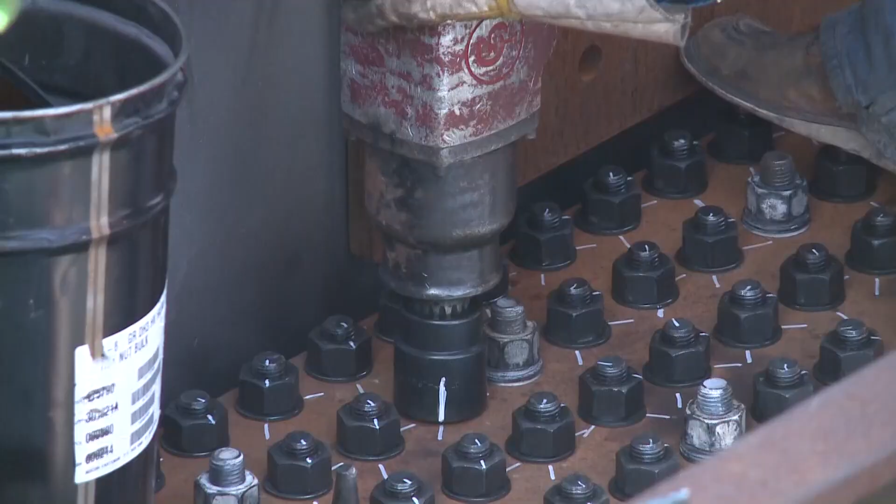Though Lynette Bryant hasn't been at it nearly as long as Miller, her time on the project represents so many different things. It makes me feel like times have really changed to where they don't look at me as being a woman. They look at me as being one of their co-workers, you know, and I appreciate it. And they give me the respect that, you know, that I deserve.

It's just one of the many memories that will stay with her long after the bridge is finished. Like, wow, I'm building this. I'm building this, and years to come, I can look at it and say, I was a part of that. I was a part of it, you know. Just make myself proud. In all, more than 3,400 workers helped on the bridge during the 4-year construction project, spending thousands and thousands of hours building the Stan Musial Veterans Memorial Bridge.

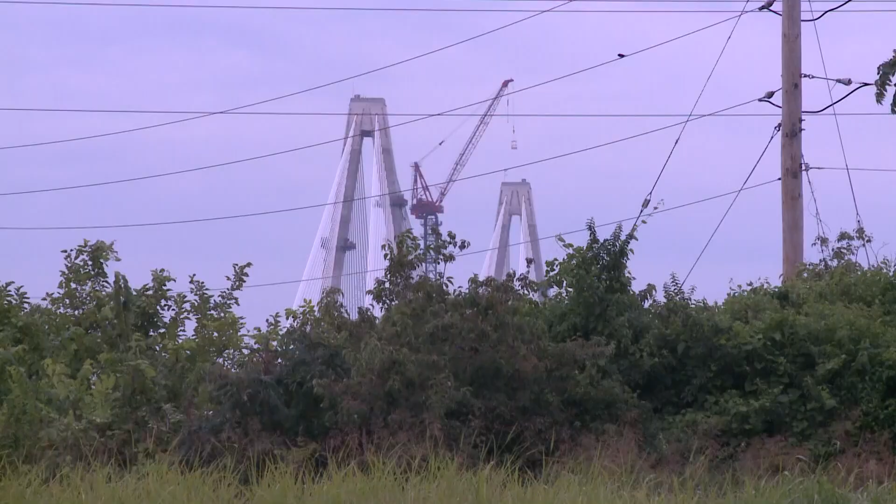Once the bridge's towers pass the midway point, they're an addition to the skyline that can be seen from all over town. Vinny Guldani is keeping an eye on the bridge's progress from the fairway at Gateway National Golf Links in Madison, Illinois. The views are great. We get quite a few holes that we look right back into the city. Great views of the arch. You really can't beat it. He noticed parts of the span finally peeking over the trees a short time back.

Seems like, you know, every few weeks the view kind of changes with different machinery on the bridge and just, you know, as the seasons change, the views change. So sometimes, like now, we don't get the best view of the bridge, but whenever the leaves start falling, we get to see right through and see all the guys hard at work. And he's not the only golfer that's noticed.

Amazing. You know, when you sit here and you look at it. Even miles away and partially built, the bridge is hard for Paul Spotansky to miss. You really don't get a good perspective of what's going on until you get close by and you see all the amount of work and the heavy construction and basically how high those guys are working up in the air. A first for Spotansky and a first for the St. Louis skyline. St. Louis has a beautiful skyline with the arch and all the high rises, but I mean, adding the bridge can't do anything but make it even prettier than it is.

But it's not just the new addition to the skyline Guldani looks forward to seeing. Reducing traffic on the Poplar is sure to make it easier to get in a round of golf. Absolutely. You know, I kind of work my golf game around the traffic that I think is going to be on the Poplar. It's truly a good engineering feat to build something like this in the middle of the Mississippi River. The devil is in the details. Coming up, 4 years after they started, workers put the finishing touches on the new bridge.

It's the middle of September 2013. Opening day looms just 4 months away, and there is still plenty to do. Putting up the railing from the outside, electrical work, a lot of miscellaneous things. We'll see after the overlay is on if we have to do any final cable tensioning. At one end of the bridge, workers are building the form for the center median. At the other, it's being filled. It's a process that moves at a snail's pace on this hot September day. It's just another check mark on what seems like the ultimate to-do list.

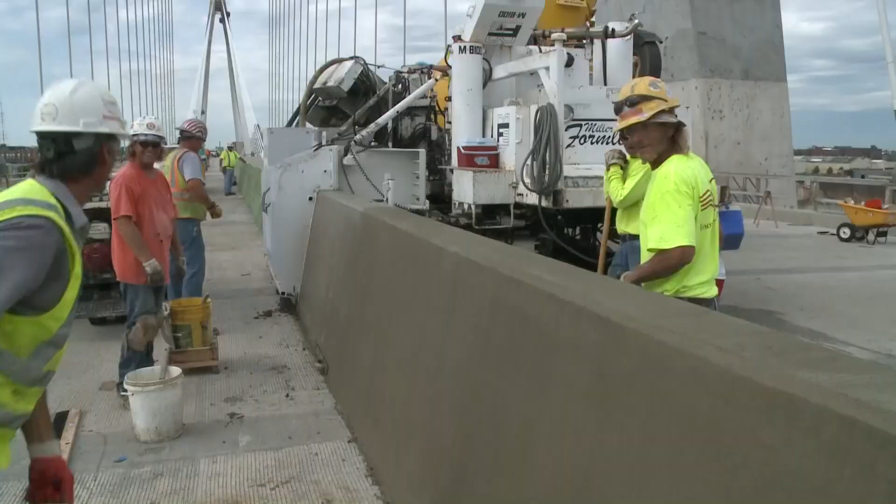Things don't wrap up like this by accident. It's all a lot of planning, a lot of coordination meetings with a lot of different folks. The bridge must still be painted, the driving surface poured. And as construction creeps towards completion, engineers look past the ribbon cutting, when the bridge will finally do what it was built to do. So we have a huge cleanup to some of our traffic messes, which is going to be hopefully an economic boom to the community. Finally, in early February, another milestone.

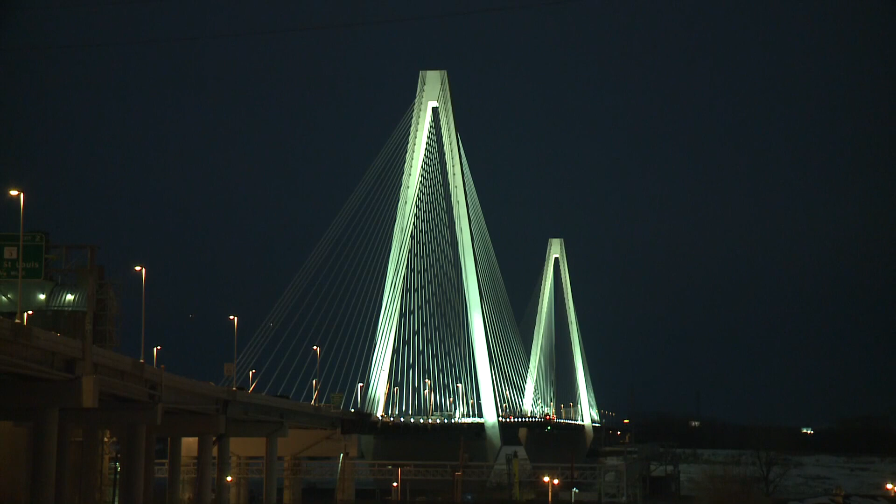But tonight we wanted to give a little preview of the bridge for you to see. A small crowd gathers on the bridge for the formal lighting ceremony. This is a perfect tribute to such a beloved man and athlete in the St. Louis area to name this bridge after him, and so many veterans who have risked their lives so that we can have our freedom. And with the flip of a switch, 3, 2, 1, go! The Stan Musial Veterans Memorial Bridge illuminates the St. Louis skyline for the first time.

It also took an act of Congress to name the bridge after Stan Musial and our veterans. For Cardinal fans and Stan's family, it's a mammoth memorial for a man who was larger than life. On this cold February day, Brian Schwarze climbs to the top of a bridge honoring his grandfather, who climbed to the top of his game.

No one left a mark on Cardinal baseball like the beloved Stan Musial. And with wind howling and temperatures dipping, Schwarze celebrates with some of the men who helped build the bridge that bears Stan's name. The magnitude of the project and the view is not lost on anyone. The two states really came together and decided that it was best to be named after the veterans and Stan Musial as well, which I think is a great fit. But to see this awe-inspiring bridge behind me is something to be seen.

Sullivan's first pitch to Stan is swung on as a drive back into right field. Schwarze says the structure is a fitting memorial because Stan the man was such a bridge builder in life. He was always a man. I mean, he saw through all the black and white and everything, and just saw people as people.

The Musial family believes the new bridge may be the perfect symbol for baseball's perfect knight. I don't know a public figure that's more in tune to a city than Stan was. I mean, what's so good about St. Louis was also what's so good about Stan. It's a family town, and that's what he was. He was a family man. He was loving. He was caring.

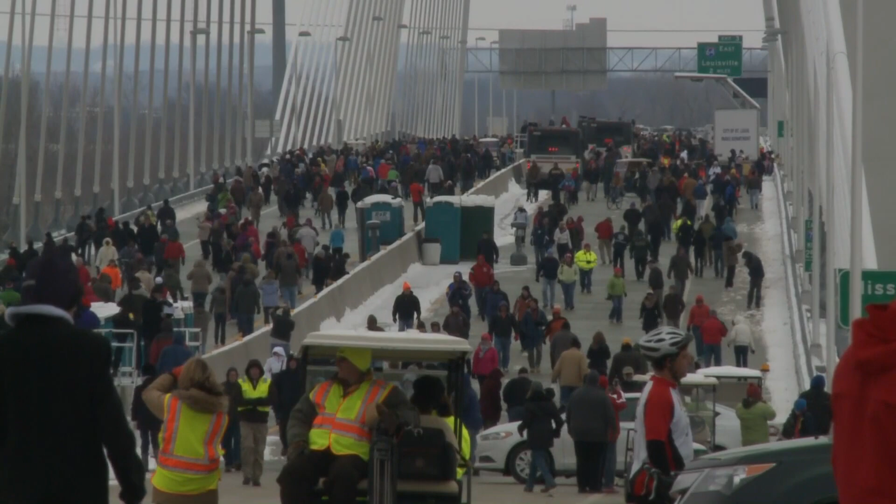No one person gets a project done like this by himself or herself, but I was very proud to take this on. After years of planning and construction, it's finally finished. Coming up, celebrating the opening of the Stan Musial Veterans Memorial Bridge.

Welcome to the ribbon cutting ceremony for the Stan Musial Veterans Memorial Bridge. On a cold February morning, thousands of people took advantage of a rare opportunity to walk across the new bridge. And this is the place to be. Everybody's here. Some came to pay tribute to our veterans who sacrificed for our freedom. Others wore their cardinal red, honoring one of baseball's finest. And everyone had a memory of the great Stan Musial to share. I enjoyed watching him play back in the day, even in Sportsman's Park as a kid, and so I think it's a neat way to honor him.

It was a morning for celebration, the culmination of years of planning and construction. I can't tell you how many people were involved in the process. No one was more involved than Illinois Congressman Jerry Costello, who began working on it in 1984. Through his work and others, Missouri and Illinois became partners in a daunting project. This is what we can accomplish when we come together, put our political differences and regional differences aside, come together to better the transportation system for our region and for our country.

3, 2. With just a snip of a giant scissors, St. Louisans fell in love. We now have the Stan Musial Veterans Memorial Bridge. It just feels like the old days when NASA was really appreciated, and going to the moon was appreciated, and still appreciating what it takes in engineering and what our country still does. I've seen a lot of bridges in different cities, but I don't think I've ever seen one like this. From the sea of walkers to the Clydesdales, on that freezing morning, it seemed the whole community was there.